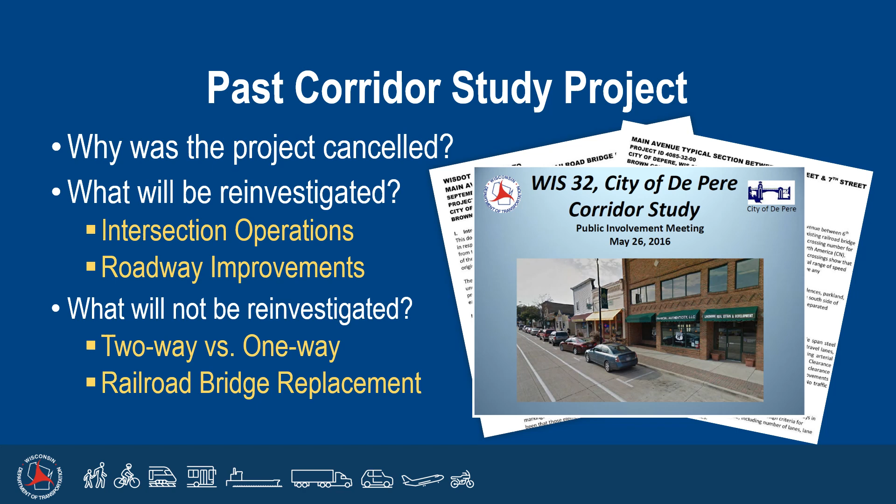Additionally, the past corridor study concluded adding a lane only slightly improved traffic flow. Also, adding an eastbound lane would have impacts to the Fort Howard and Main Avenue intersection that would work against any added benefits. For example, the added lane may require a signal at the Fort Howard intersection, which may reduce capacity of any added lane.

As you can see here, we are very early in the design. Currently, we are working towards a signed environmental document in the spring of 2024. Then final design can begin, with utility construction in 2027 and road construction in 2028.

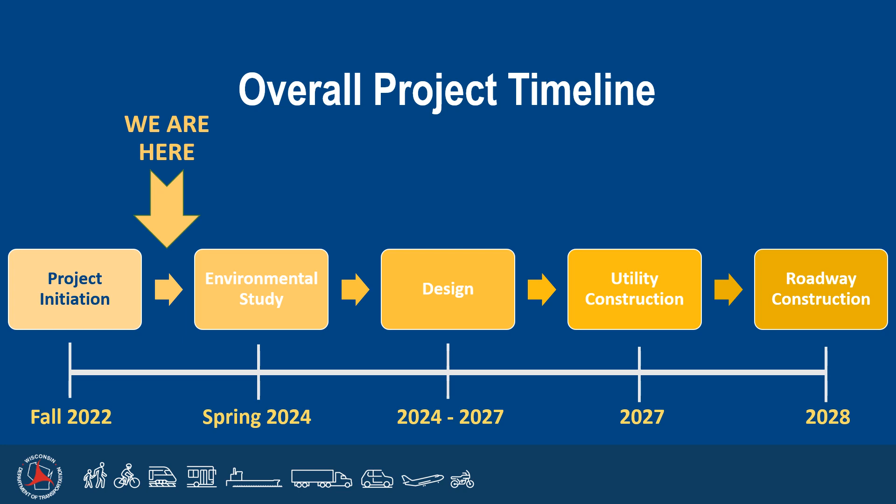The project was kicked off this last fall. Some early data collection has already begun. As we work towards a final environmental document, we will continue data collection, investigations, and gather input from stakeholders. Over the next year, we will refine the alternatives to determine the final project scope and impacts. We will have another public meeting in late 2023 to discuss the final scope.

Wisconsin 32 is a connecting highway. A connecting highway is defined as a local street that carries state highway traffic. The city is responsible for maintenance of this section of road. Connecting highway state aids help to maintain the road. The city will maintain the road after the project. The entire project is within the City of De Pere connecting highway limits. No change to limits will occur as a result of this project.

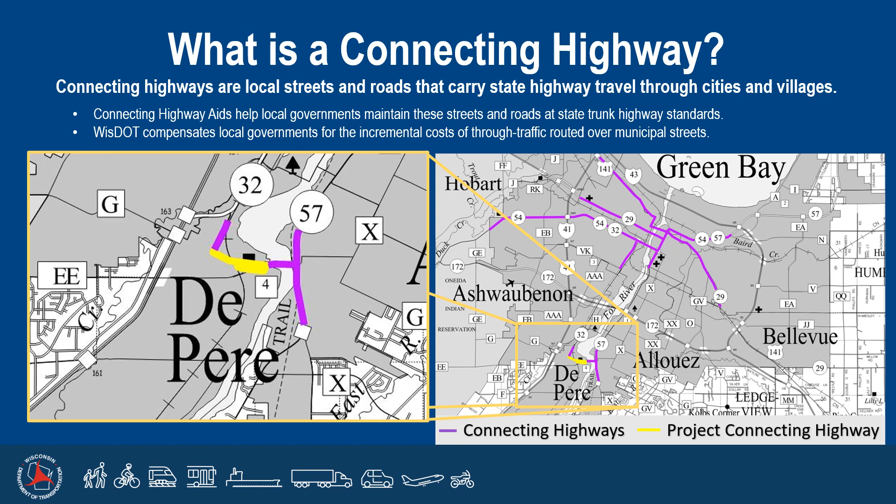Also, being a connecting highway means the city is responsible for 25% of the project design costs. The overall project limits will vary depending on project impacts and the alternative chosen. This display shows potential limits, but is not the final limits.

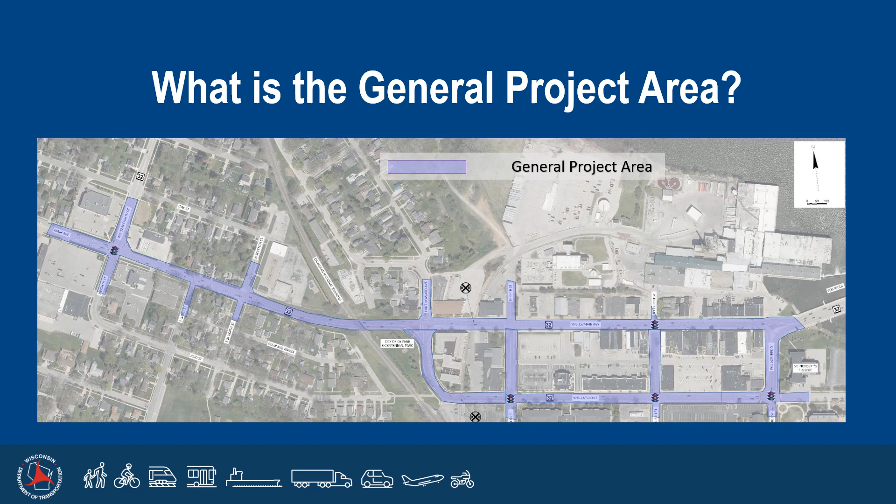The need for the project is to address pavement deterioration, aging storm sewer, and upgrading curb ramps to ADA compliance. Other needs include upgrading the 2 at-grade railroad crossings, addressing aging utilities, investigating operational needs at 8th and Fort Howard Avenue intersections, and upgrades to bike and pedestrian facilities where feasible.

There are 3 alternatives proposed for this project. A no-build alternative would continue with general maintenance. The pavement replacement would replace all pavement from back of curb to back of curb along the corridor.

Storm sewer repairs and curb ramp upgrades to ADA compliance would be included. This would result in some sidewalk impacts. The 2 at-grade rail crossings would be evaluated for safety, signal, and crossing improvements. The city may choose to fund other improvements on the corridor.

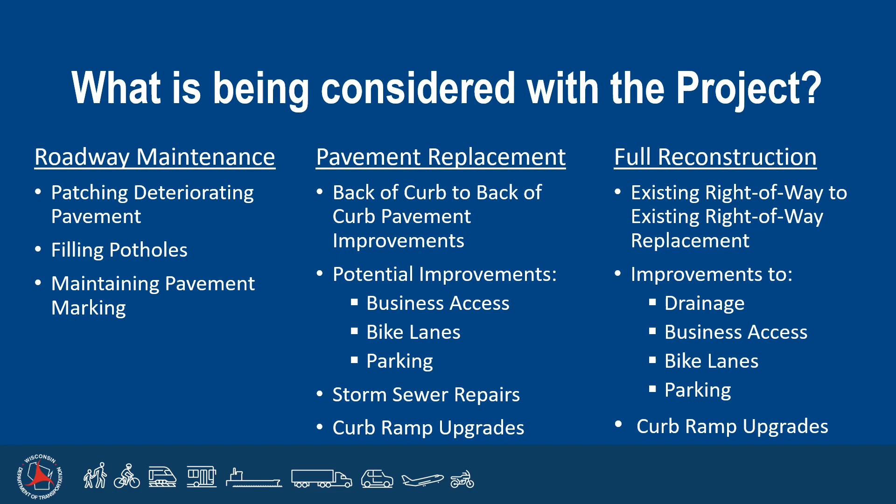A full reconstruct is similar to pavement replacement, except it would replace pavement and sidewalk within the entire existing right-of-way width. In addition, the road profile, alignments, and drainage may be modified. The city may choose to fund other improvements along the corridor. The difference between the two is what occurs behind the back of curbs, which is based on project impacts and city participation.

Regardless if either pavement replacement or full reconstruct alternative is chosen, the funding responsibility doesn't change. However, some of the elements may overlap depending on what the final scope of the project is. A lot has to be determined yet on project impacts, which will help sort out what is DOT funded and what is city funded items.

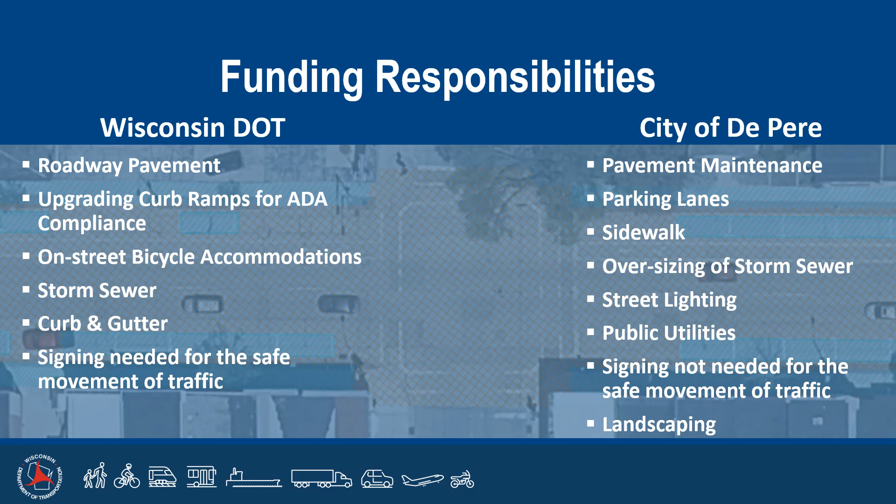The project has 5 different cross sections. We will go through each unique section and the proposals. These are available on the project website also.

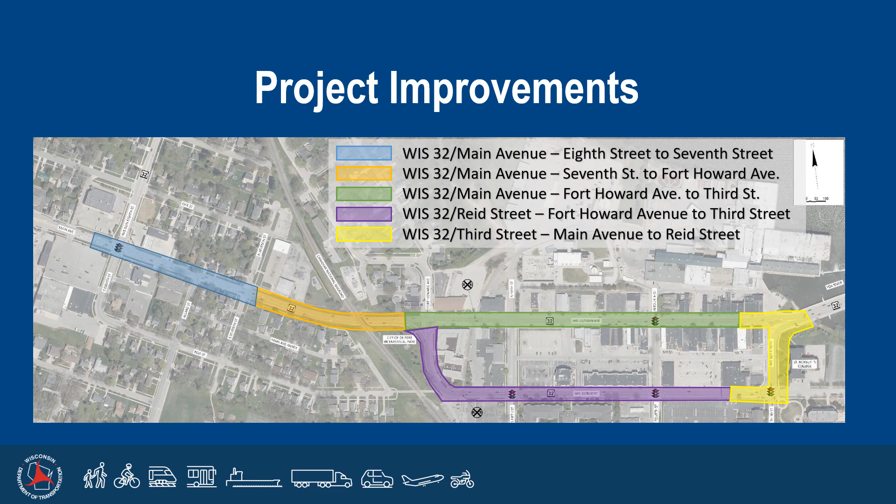The cross section between 8th and 7th Streets has existing substandard lane widths of 10 feet. It is desired to have 11-foot lane widths given the traffic and truck volumes on the corridor. We propose to increase all the lanes to 11 feet. The grass terrace would then decrease in width to 8 feet.

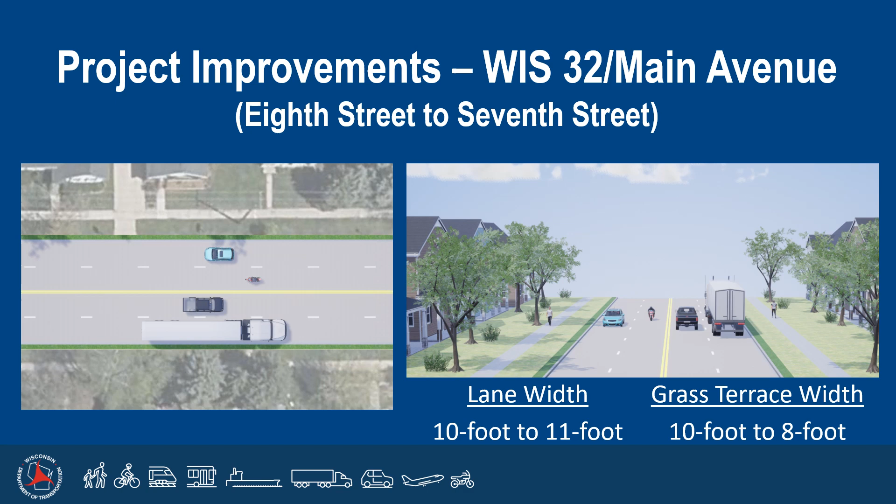The cross-section width is tight under the railroad bridge. The existing lane widths vary, with 1 eastbound lane and 2 westbound lanes. A few options are available to improve lane width and pedestrian safety.

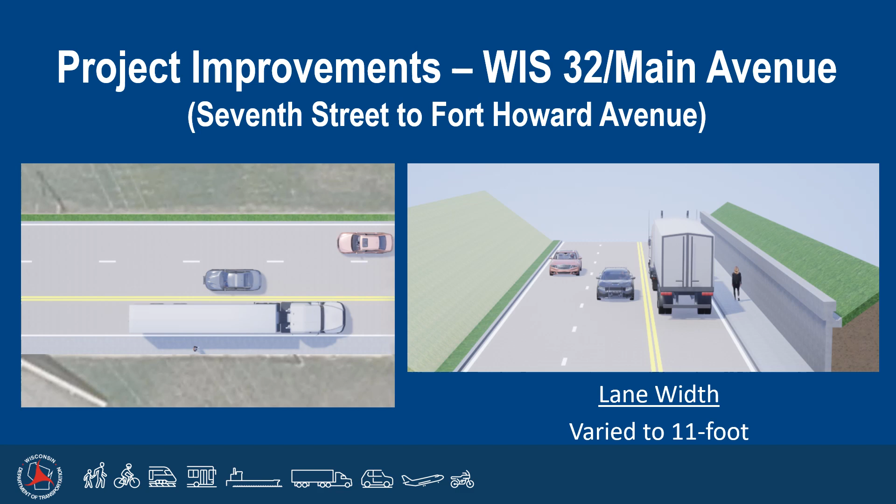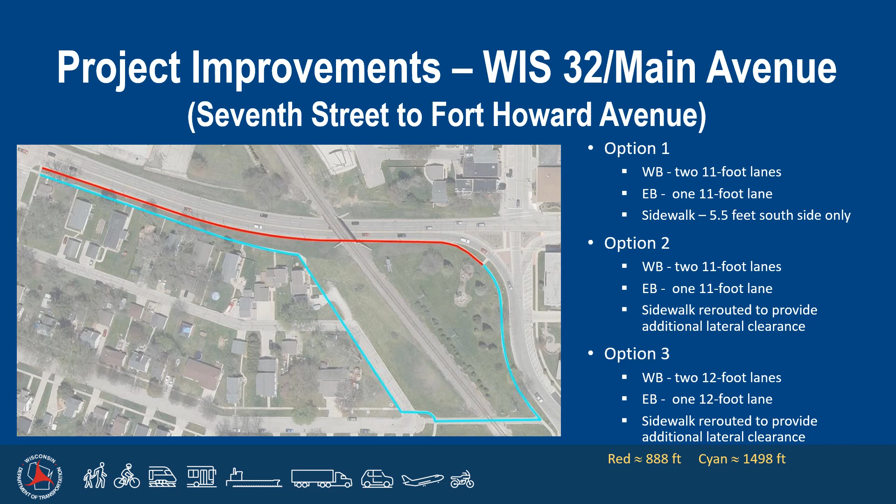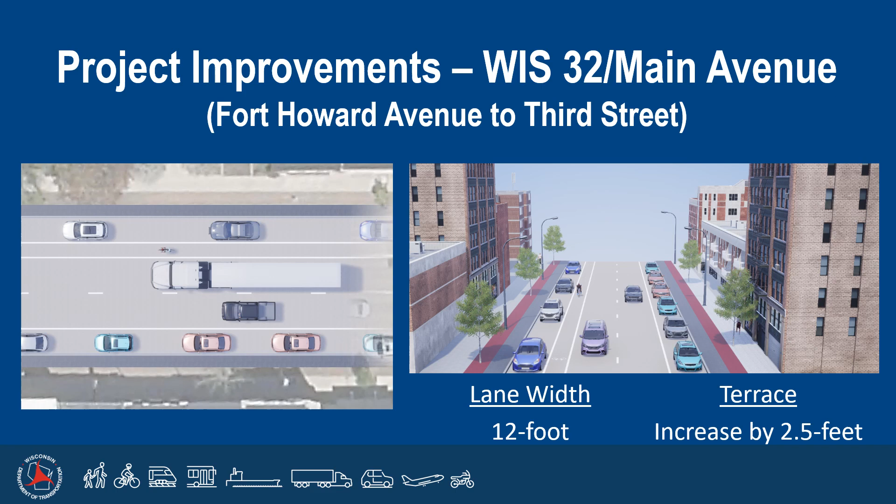Improvements to Main Avenue between Fort Howard Avenue and 3rd Street would eliminate the extra pavement that exists. In the past, there were more through lanes that have since been eliminated. 2 through lanes, parking lanes, and a bike lane would remain. By eliminating the extra pavement, the terrace would increase by 2.5 feet on both sides.

The proposal for Reid Street is to keep the cross section the same as it is today.

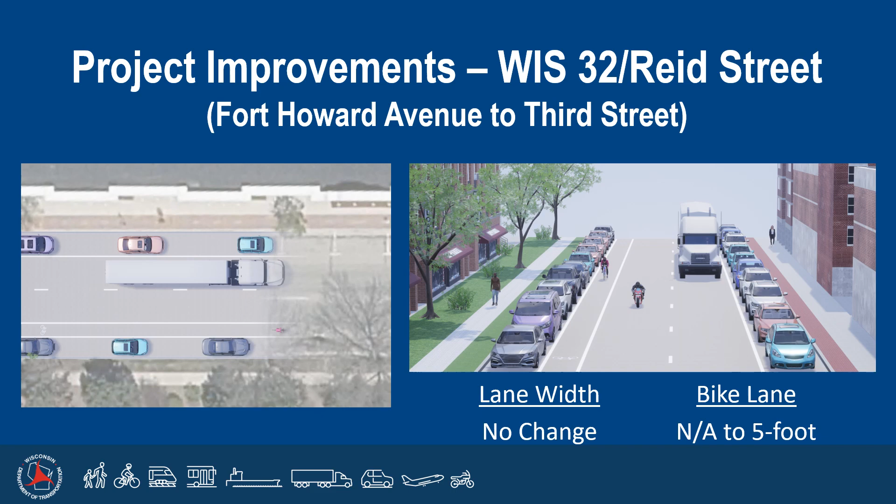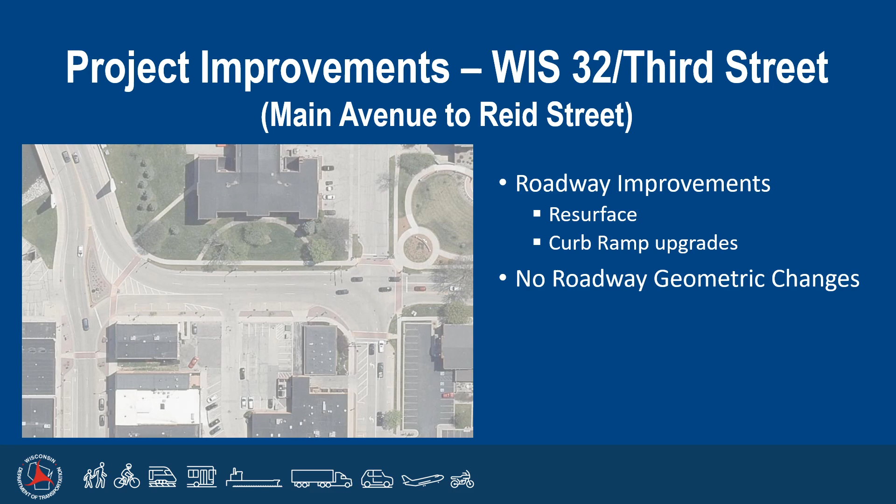The 3rd Street area is proposed to be resurfaced with curb ramp upgrades to ADA standards. No other changes would occur as this section is newer.

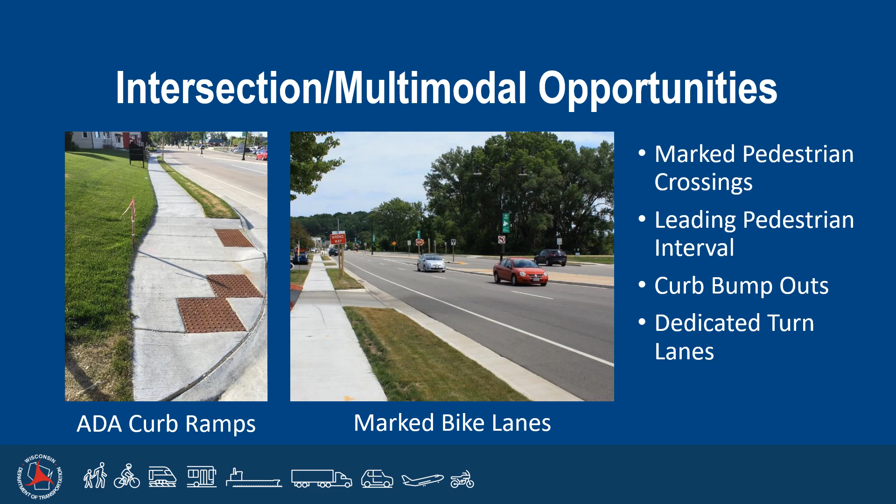There are some intersection and multimodal improvement opportunities. We will need to update curb ramps to ADA standards. Other items to further review are to provide marked crosswalks and bike lanes where feasible. We will look further into curb bump outs and dedicated turn lanes.

So what are the next steps? We want to gather input from all stakeholders on this project. Over the next year, we will finish investigations, refine the alternatives, determine impacts, and determine the scope of the project. During that time, we will continue to coordinate with local stakeholders and the city.

Next fall, we will hold another public meeting to discuss the final scope. In the spring of 2024, we'll sign the environmental document and then begin work on the final design.

There is a design website created that provides project information, contacts, and resources. The materials from the public meeting will be posted there. Several methods to provide project comments and feedback are also on the webpage.

WISDOT's In This Together Business Coordination Program has been around for many years. 2021 marked a new chapter for the program as department staff launched a coordination guide, which you'll find at wisconsindot.gov/together. It includes tips, tools, and resources such as worksheets on project timelines and the various questions you might consider asking.

For example, to ensure you have a firm understanding of the project schedule, that temporary directional signing is in place, and that any detours or parking needs are communicated to customers in a timely fashion. Also, we've built an internal quality control process where a committee of staff from the outreach, communications, and project sections will come together to review case studies and make recommendations for process improvements.

WISDOT believes the success of any project should go hand in hand with the greater continued success of the communities we serve. Business coordination is highly important in the process. We cannot always promise a tailored solution, but we do always strive to be attentive and help coordinate around issues or concerns that may arise.